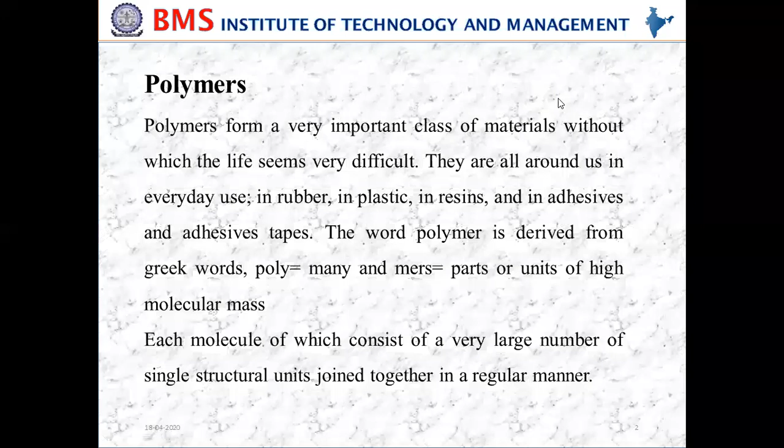What does the word polymer mean? Poly means many, and mers means small parts or units of high molecular mass. So each molecule consists of a very large number of single structural units joined together in a regular manner. In other words, polymers are giant molecules, larger molecules of high molecular weight, called macromolecules, which are built up by linking together a large number of small molecules.

So a polymer is a big molecule which is made up of smaller molecules, and generally it is called macromolecules. This is how you combine all these small molecules and make them into giant molecules.

That process is called polymerization. Polymerization is nothing but the reaction by which monomers combine to form a polymer. Monomer is nothing but a single molecule which is combined together to form macromolecules, and this process is called polymerization.

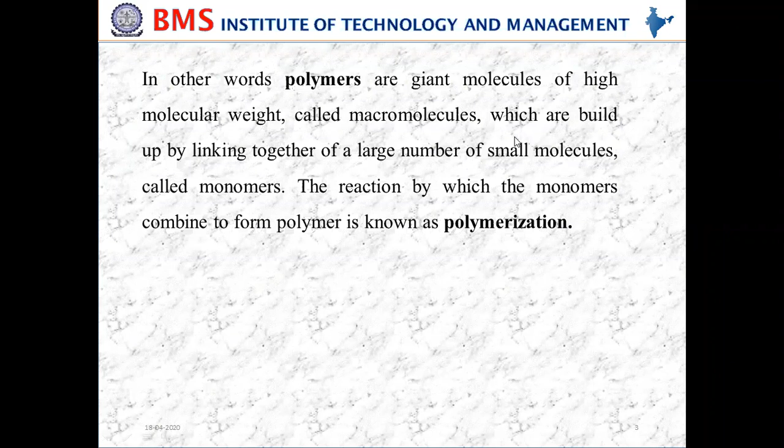So on the basis of thermal response, the polymers can be classified into two groups: thermosetting polymers and thermoplastic polymers.

Let's discuss them one by one. Thermoplastic polymers can be softened easily as well as plasticized. The name itself says thermoplastic polymers can be softened as well as plasticized repeatedly on the application of thermal energy.

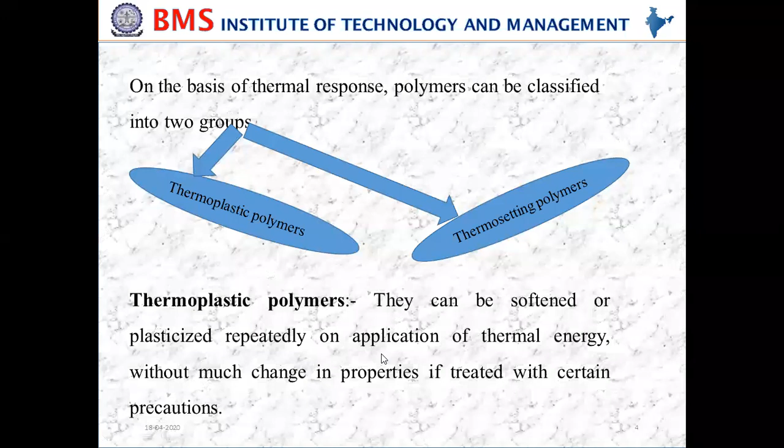Without much change in the properties, if treated with certain precautions, these materials or polymers can be softened easily as well as plasticized, and they are often formed by addition polymerization.

There are different types of polymerization methods. Addition polymerization is used to form certain kinds of thermoplastic polymers, leading to long linear chain polymers with no crosslinks. They soften readily on heating because secondary forces between the individual chains can break easily by heat, light, or pressure.

With this, we can easily break the link so that it can become soft, because the bond, our secondary forces between the chains, is broken, so that the material can become softened.

They can be reshaped and reused from the waste. These thermoplastic polymers can be reshaped or reused also, and these are usually soft in nature, weak, and less brittle. They can be reclaimed, meaning reproduced from the waste.

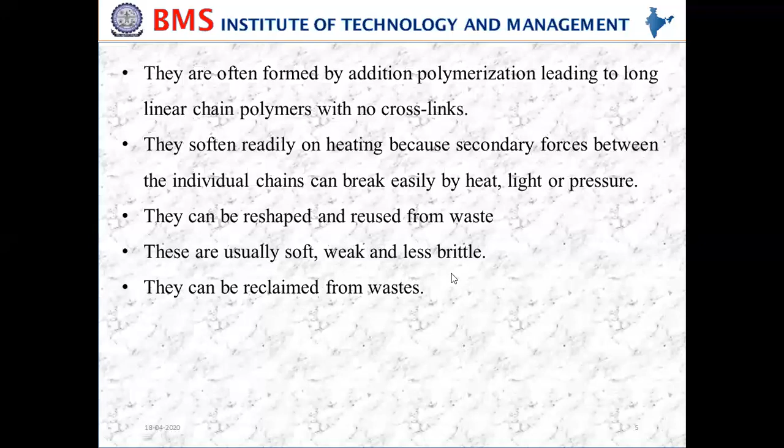They are usually soluble in suitable solvents, and adjacent polymer chains are held together either by van der Waals forces, dipole-dipole interaction, or by hydrogen bonding.

During molding, there is no change in the chemical composition, because the only change is that they can be softened and plasticized, that's all. They cannot change the chemical composition upon heating. These are generally tough materials.

Examples of such polymers are polyolefins, nylons, linear polyesters, polyethers, and polyvinyl chlorides, like PVC pipes. Pipes are generally made up of PVC, polyvinyl chloride, and sealing wax, etc. So all these are called thermoplastic materials.

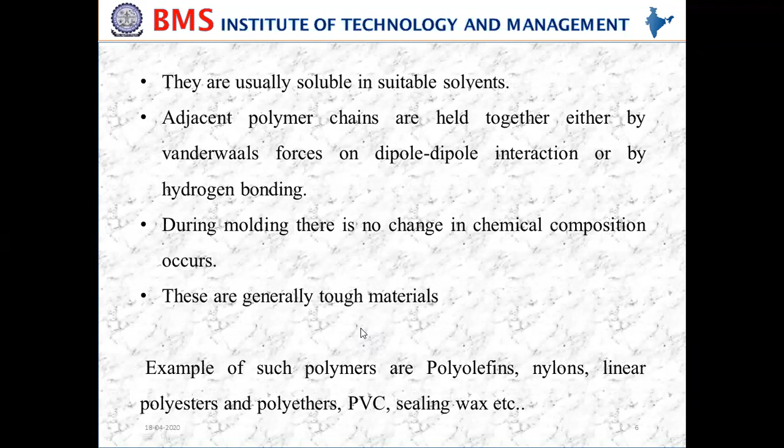I think you'll be knowing how much it is useful in everyday day-to-day life. And we'll move to the next, thermosetting polymers.

One more kind of polymer based on the thermal response. As we discussed, based on this response, we have two kinds of groups: one is thermoplastic polymers and the other one is thermosetting polymers. Thermosetting polymers are nothing but some of the polymers which undergo certain chemical changes, whereas thermoplastic polymers cannot undergo this chemical change.

Thermosetting polymers can undergo the chemical change on heating and convert themselves into an infusible mass which cannot be melted.

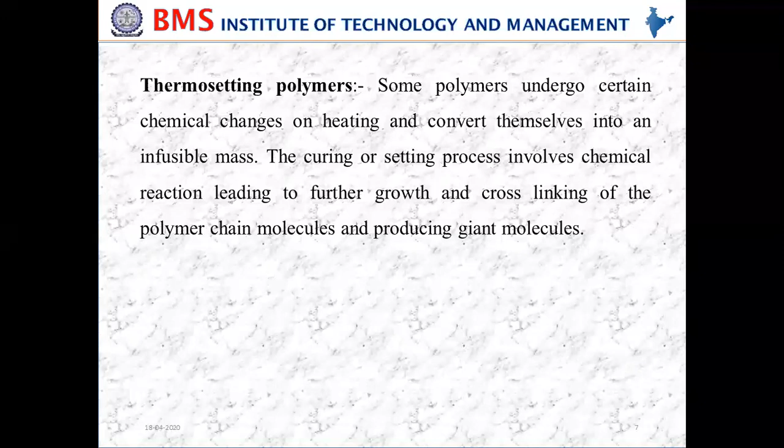The curing or setting, the drying process involves a chemical reaction leading to further growth and cross-linking of the polymer chain molecules and producing giant molecules. So these thermosetting polymers, upon heating, change their chemical composition.

They are often formed by condensation polymerization. As I told you, thermoplastic polymers are formed by the addition polymerization process, whereas thermosetting polymers are formed by condensation polymerization, which leads to three-dimensional network structures. They do not soften on heating.

Thermoplastic materials can be softened, but thermosetting materials cannot be softened; instead there is a change in chemical composition. On prolonged heating, however, charring of the polymer is caused—carbonization can happen, causing the charring of polymers.

They cannot be reshaped and reused like thermoplastic polymers, which can be reshaped and reused, but thermosetting polymers cannot be reshaped and reused.

They are usually hard when compared to thermoplastic materials. Thermoplastic polymers are soft in nature, weak, and less brittle. But thermosetting polymers are opposite to that—they are usually hard, strong in nature, and more brittle.

And they cannot be reclaimed from waste. As we said, since they cannot be reproduced or reshaped, they cannot be reproduced from waste.

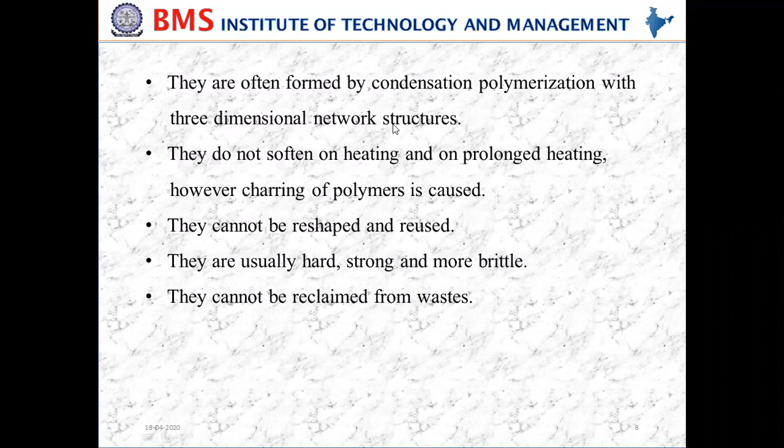Due to strong bonds having inter- and intra-chain cross-linking, these are all insoluble in almost all organic solvents, whereas thermoplastic polymers can be soluble in some solvents, but thermosetting polymers cannot be soluble in all organic solvents.

Adjacent polymer chains are held together only by strong covalent bonding, whereas in thermoplastic materials, dipole-dipole interaction or hydrogen bonding occurs. In thermosetting polymers, we have strong covalent bonding between the chains, and during molding, further polymerization and cross-linking occurs.

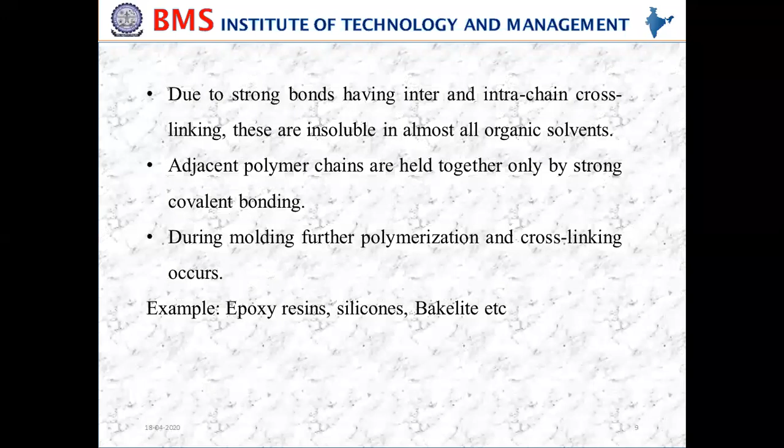If you see some examples of thermosetting polymers, we can see epoxy resins, silicones, and bakelite—these are all called thermosetting polymers.

Next, we move on to ceramics. One more material you can call ceramics. Ceramics are classified as inorganic and non-metallic materials—inorganic meaning it doesn't contain any carbon content, and non-metallic meaning it doesn't have any metallic materials that are essential to our daily lifestyles.

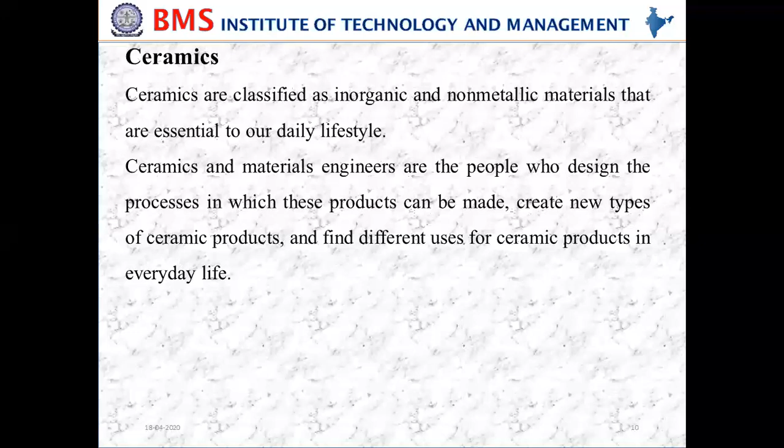But we are using ceramics as well. Ceramics and materials engineers are the people who design the processes by which these products can be made, create new types of ceramic products, and find different uses of ceramic products in everyday life.

What is ceramics? Ceramics is generally made by taking mixtures of clay, earthen elements like pottery—pottery is a ceramic material—and taking mixtures of clay, earthen elements, powders, and water, shaping them into desired forms, like crockery and pottery items made up of ceramics.

Once the ceramic has been shaped, it is fired in a high-temperature oven known as a kiln. So once the ceramic is formed using these powders, water, and earthen elements, it has to be heated in this particular oven called a kiln.

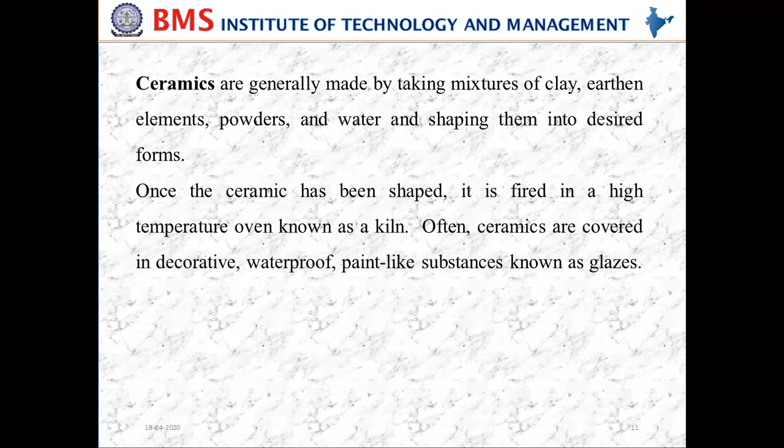Often, ceramics are covered in decorative waterproof paint like glazes, applied on the surface to provide waterproofing. Because it is made up of clay, a porous structure exists in pottery-like materials, so to prevent water leaking, these surfaces are painted with a paint-like substance known as a glaze, so that it cannot leak.

Next, amorphous ceramics. What is amorphous ceramics? Amorphous ceramics are nothing but called glasses. So a ceramic material which is an inorganic product of fusion that has cooled to a rigid condition, without crystallization.

It has a non-crystalline or amorphous structure. If you look at this bottom one, crystalline is linear and has orientation in a straight line. Whereas in the amorphous structure, we don't have the structure in a particular orientation. It has its own different orientations. It is not in a linear form. So amorphous ceramics glasses have the non-crystalline or amorphous structure.

It has a non-crystalline or amorphous structure. These molecules in a glass change their orientation in a random manner throughout the solid material. So it has changed its orientation. That particular molecules change its orientation in the glass amorphous materials. So these are called crystalline materials, and this is called amorphous materials. The structure of molecules in the amorphous.

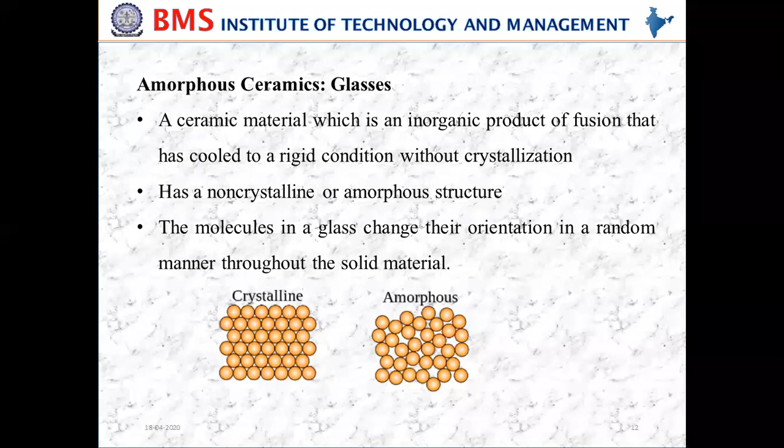Whereas glass optical fibers are constructed of tiny strands of glass that are bundled together inside an application specific sheathing like stainless steel for durability and high temperatures. They are attached to certain photoelectric sensors and guide light from the sensing head to the target. So it acts as a guide light, acting as a guide from the sensing head to the target.

So glass optical fibers have an impressive temperature range, as low as -40 degrees centigrade to plus 480 degrees centigrade. That's why, because of this, they don't have any electrical components. They merely act as channels. These fibers act as channels, meaning a light guide between the target and the sensor, so it acts as a guide channel from the target to the sensor.

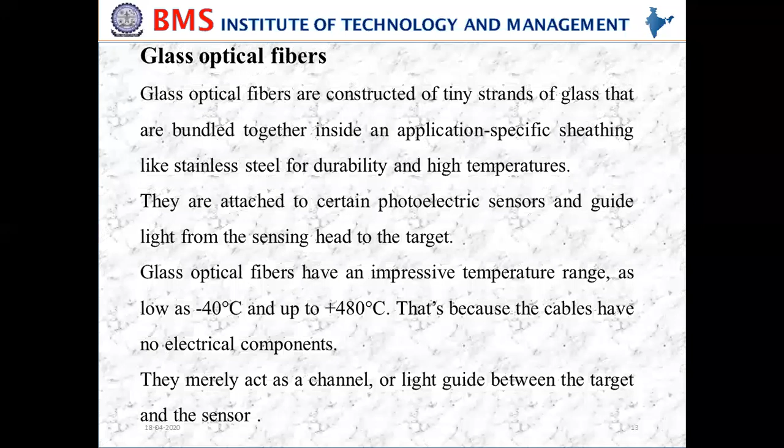Next, oxide glass. This glass optical fiber is made up of alumina with a composition of 90% alumina as well as 10% germanium oxide. So this is called oxide glass, where alumina is 90% and germanium oxide is 10%, which is used in fiber optic applications like communication networks. It's extremely clear glass used for fiber optic waveguides in communication networks.

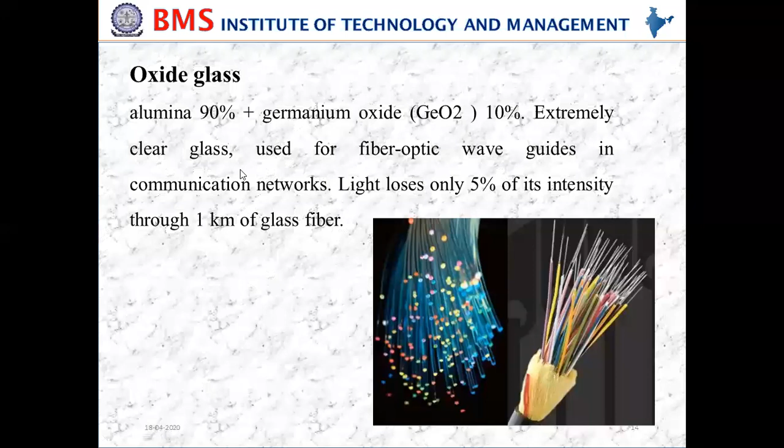Here, the light loses only 5% of its intensity if it travels 1 kilometer through the glass fiber. It loses only 5% of the intensity of the light. That's why these are widely used in communication networks like fiber optics.

So what are the factors that make it useful for fiber optics? It has really low loss, about 0.2 decibels per kilometer, at around 1550 nanometer wavelength of light. So we'll be losing only a small amount of light intensity per kilometer. In the same wavelength range, the material dispersion is also very low.

So it will not disperse much. This light will not be dispersed much even at the wavelength range of 1550 nanometers, meaning light pulses do not spread very much. They are also pretty resistant to electromagnetic interference, and are available at low cost. The combination of all these factors...

...has led to the ability to build and produce fiber optic systems that span thousands of kilometers and are able to transmit many terabits per second on a single fiber strand. This is how, even nowadays, in the internet we use fiber nets and all those, because the loss is very low.

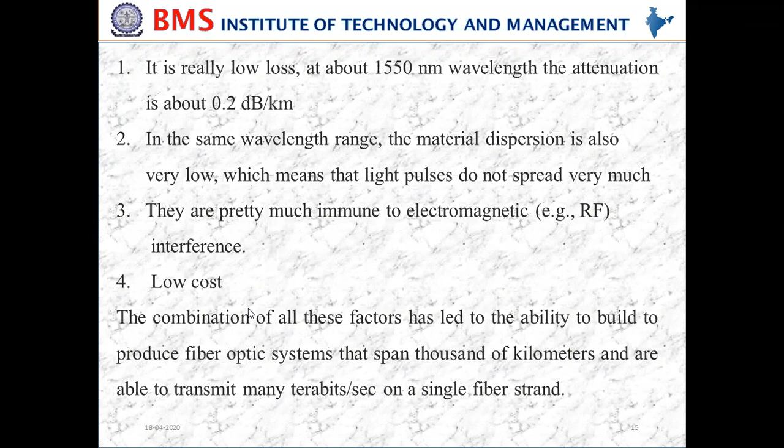Next, CERMET. What is a CERMET? The first three letters, CER, stand for ceramics, and MET stands for metals. So if I combine ceramics and metals, it forms a CERMET. Generally, CERMETs are made to serve the purpose of combining ceramic properties and metal properties together to form CERMETs.

So how are these CERMETs formed? It's a composite material composed of ceramic materials and metallic materials. A CERMET is ideally designed to have the optimal properties of both — ceramic properties as well as metal properties. Ceramic properties such as high temperature resistance and hardness, and metal properties such as the ability to undergo plastic deformation. So high temperature resistance and hardness can be obtained from ceramic materials, and the ability to undergo plastic deformation comes from metal. These properties can be combined to get a CERMET, a composite material.

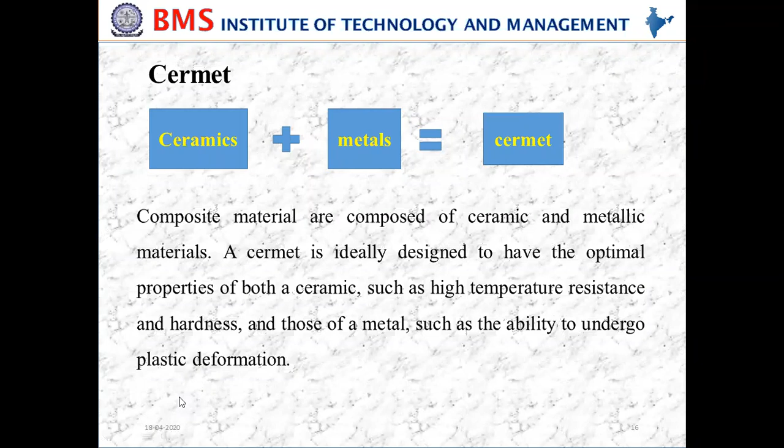Next, what is the composition? As I told you, it is made up of ceramic materials as well as metallic materials. Ceramics used are tungsten carbides, molybdenum borides, and aluminum oxides, and with the metals we use iron, cobalt, nickel, and chromium.

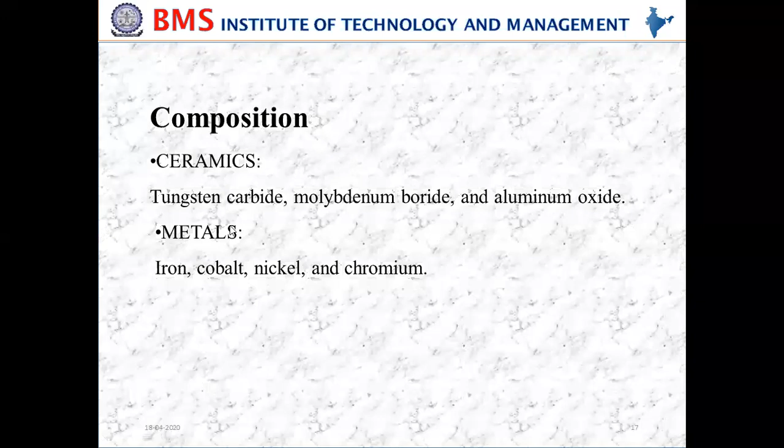Next, what are the properties of this? Properties include high temperature resistance, hardness, high strength, ability to undergo plastic deformation, superior wear and corrosion properties, and more resistance to high velocity impacts.

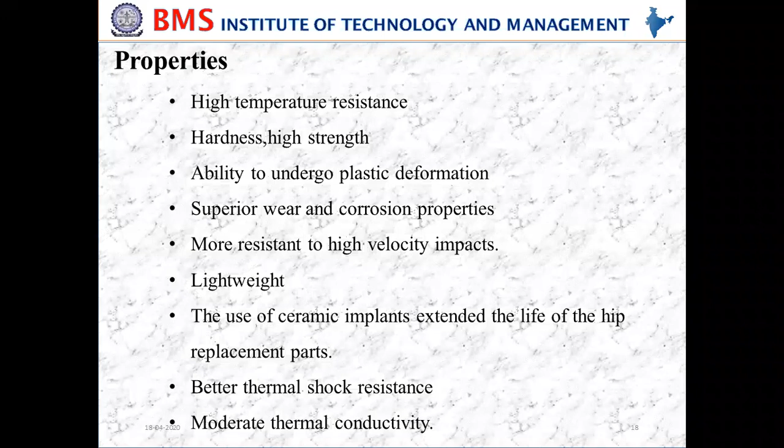In the manufacturing field, CERMETs are used as resistors, capacitors, and other electronic components, as well as vacuum tubes, joints, and seals.

In spacecraft, we use them as shielding. Bioceramics play an extensive role in biomedical materials. In transportation, they are used as friction materials for brakes and clutches, and in armor as lightweight, ceramic projectile-proof armors.

In the nuclear field, they are used for storage of nuclear waste, as well as fabrication of engines and nuclear reactors. CERMETs have the properties of both ceramic materials and metallic materials, so they can be used in all these kinds of areas.

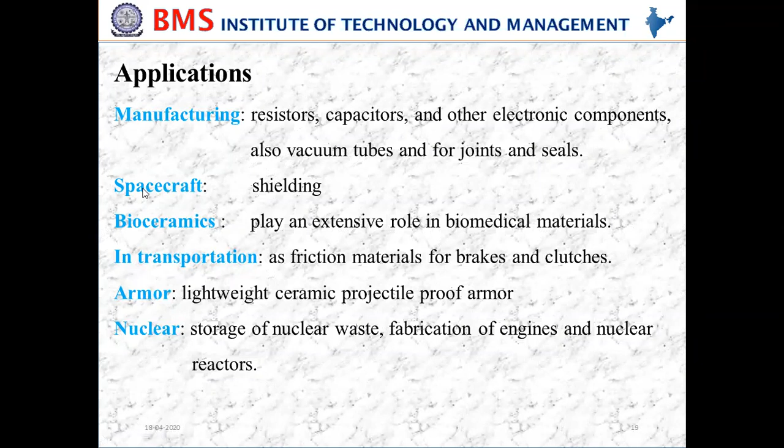Next, we'll move to composite materials.

In the present rapidly developing industrial era, there is a need for materials with specific requirements of properties. Some properties are very specific to a particular application, and it is impossible for any single material to serve those requirements. So in order to fulfill this, composite materials have evolved, and the development of new composite materials has begun.

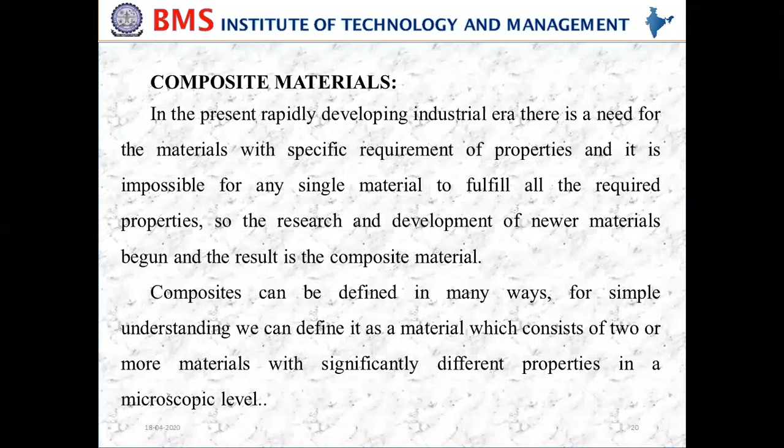Composites can be defined in many ways. For simple understanding, we can define it as a material which consists of two or more materials with significantly different properties at a microscopic level. It is a combination of two or more materials combined together to achieve specific requirements, and that's why it's called composite.

Here, the base material is called the matrix, and the constituent which is mixed into this matrix is called the reinforcement material. The matrix is the base material, and to this base material you add another material, the reinforcement material, to improve its properties.

For example, aluminum can be used as the base material. If you use aluminum as the base material, you can add a reinforcement to improve aluminum's properties so that it forms a composite material. So the base material is called the matrix, and the constituent mixed into the matrix is called the reinforcement material.

In some composites, along with the matrix and reinforcement, fillers are also used in addition. A composite is one or two or more materials combined to form a single material. So other than the reinforcement material, fillers can also be used.

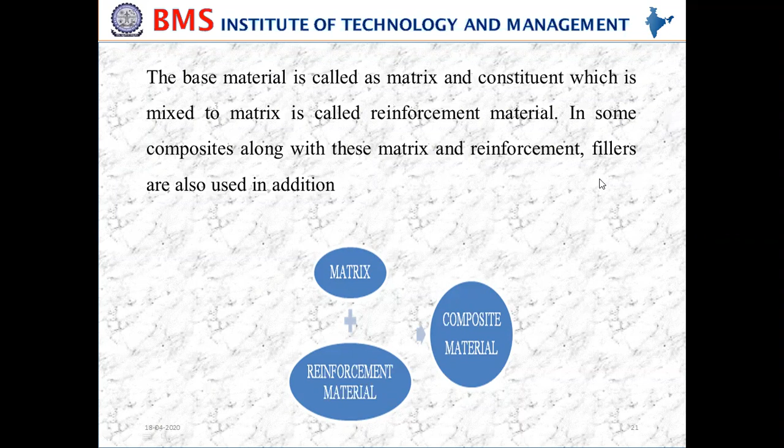Next, the classification of composite materials. Composite materials can be classified into two groups: one based on the matrix, and one based on the fiber. The matrix materials may be of metal type, ceramic type, or polymer type, and these are mixed with various types of reinforcement material, which may be particulate, fiber, or laminate. So composite materials are classified as particulate composite materials, fiber reinforced composite materials, and laminate reinforced composite materials.

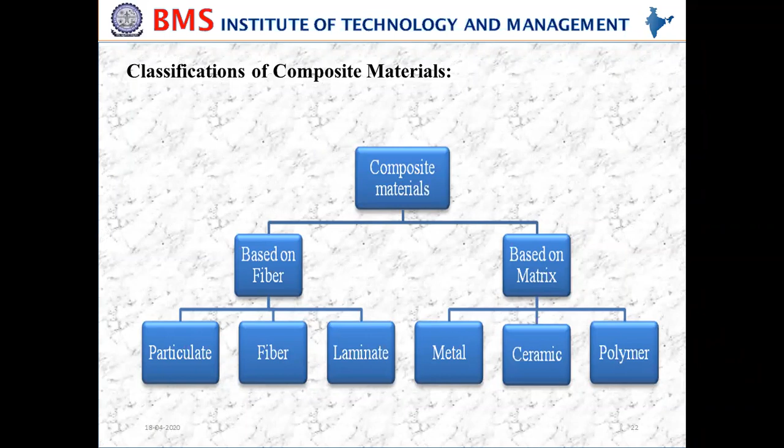Based on the matrix, we can classify composites as metal matrix composites, ceramic matrix composites, or polymer matrix composite materials, depending on the base material used - metal, ceramic, or polymer. To these base materials we add reinforcement. If we use particles, it's called particle reinforcement; if fibers, fiber reinforcement; and if laminates, laminate reinforcement. This is the classification of composite materials. According to the syllabus, we'll discuss metal matrix composites and fiber reinforced composite materials.

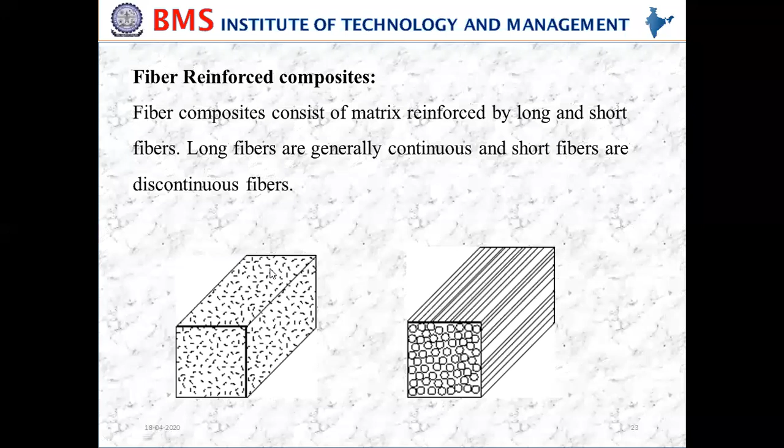Long fibers are generally continuous in nature from starting to the end, with no cutting of the material. Short fibers, also called discontinuous fibers, are cut. So fiber reinforced composites can be of two types: long fiber reinforced composites and short fiber reinforced composites.

When manufacturing a fiber reinforced composite, things to be taken care of are dimension, position, quantity, properties, and bonding of the fibers and matrix. Dimension means what length it should be - continuous or short length. Position means orientation - straight line, inclined line, or 45 degree orientation. Quantity refers to how much fiber you are going to reinforce into the material. And bonding refers to how we bind the matrix and reinforced material, and what material is used for that.

Fibers are generally anisotropic. These fibers may be unidirectional, cross-woven, or random in orientation - one direction, inclined at an angle, or randomly oriented. Generally, long fibers are used most because short fibers have very low load carrying capacity at the ends compared to other materials.

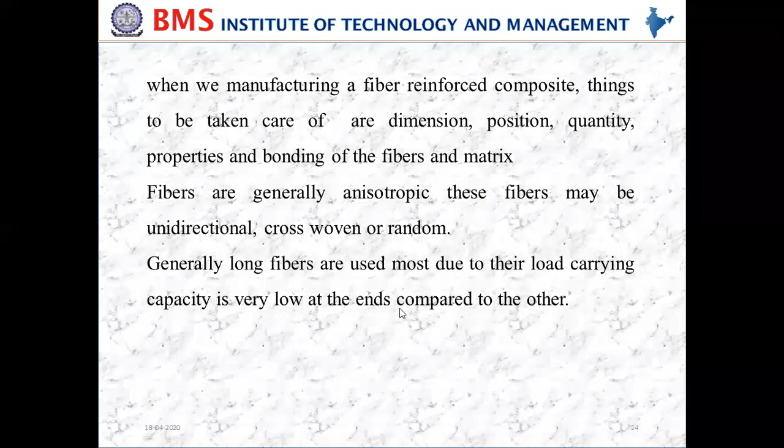Examples of matrix materials include epoxy resins, metals like copper, aluminum, and steel, and ceramics like calcium aluminum silicate. Based on the matrix classification of composite materials, we may have metals, ceramics, and polymers as matrix materials. Metals can be copper, aluminum, or steel; ceramics can be calcium aluminum silicate; and polymers can also be used as base or matrix material.

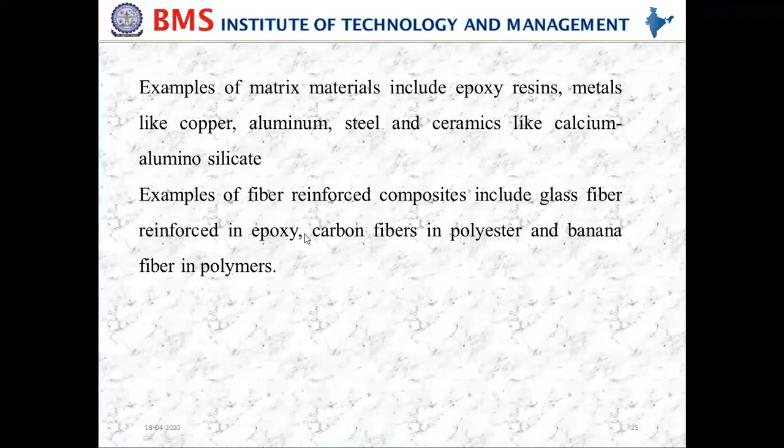What are the fiber reinforced composite examples? I can use glass fibers, which can be mixed with the matrix materials, or carbon fibers can also be reinforced with the matrix, and banana fibers too - many options are there that can be reinforced into these materials. Next, we'll move on to metal matrix composites.

Metal matrix composites means the matrix is the base material you use, meaning metal as the base material. Metals I can use are aluminum, copper, and all those. So as the name specifies, metal matrix composites, commonly called MMCs, use metal as a matrix or base material. To this base material, we can reinforce either particulates, fibers, or laminates.

So matrix materials such as aluminum, magnesium, titanium, iron, tungsten, and nickel are commonly used.

MMCs are better at high temperatures than polymer matrix composites, and they are mainly reinforced with metals and metal oxides to enhance the thermal and mechanical properties to meet the needs of design.

As we said, the metal matrix can be reinforced with other materials too, not just reinforcement materials—we can add fillers also. By adding silicon carbide fillers to metal matrix composites, properties like strength, elastic stiffness, and thermal and electrical conductivity can be enhanced.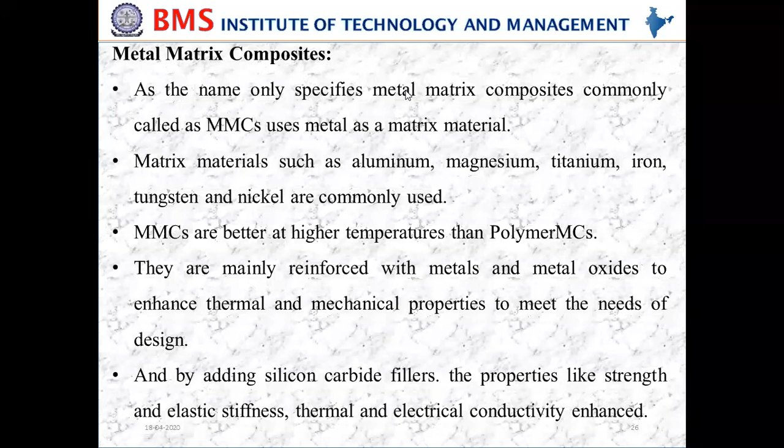MMCs generally consist of bulky metals like steel and aluminum to increase their properties. Generally these consist of steel and, mostly, aluminum—where we find maximum applications of metal matrix composites.

Advantages of these include high specific strength, because aluminum, as well as steel, has high specific strength and modulus, by adding low density metal oxides like alumina and titanium dioxide. By adding these low density metal oxides, we get high specific strength.

Graphite is used as a reinforcing material to lower the coefficient of thermal expansion for metal matrix composites.

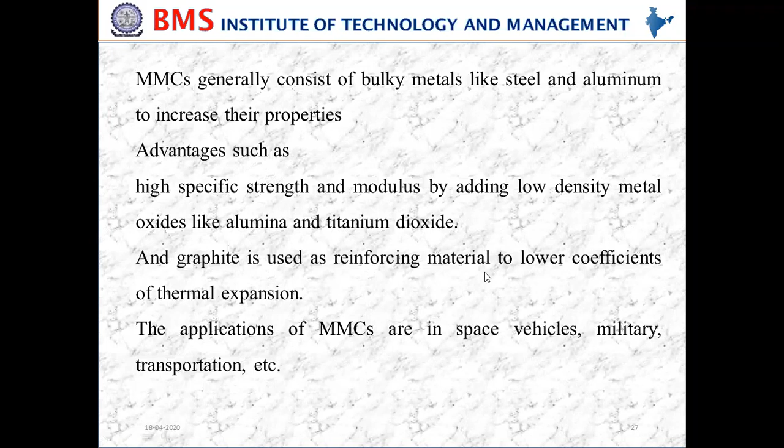The applications of MMCs are in space vehicles, military, and transportation. In space vehicles, weight is the constraint, so aluminum composites are widely used in space vehicles as well as transportation, since transportation also has weight as a criteria.

Similarly, to the base metal I can reinforce short fibers or whiskers—whiskers meaning short, discontinuous lengths. These are called short fiber or whisker reinforced metal matrix composites. We can also use long, continuous fibers. Both of these come under fiber reinforced metal matrix composites, whether short fiber or long fiber.

When making a composite material, one part is the matrix, the other is the reinforcement. The matrix is the base material I am using—is it a metal, ceramic, or polymer? Generally matrix materials can be metals, ceramics, or polymers. To these matrix materials, I may add reinforcement in the form of particles, fibers, or laminates.